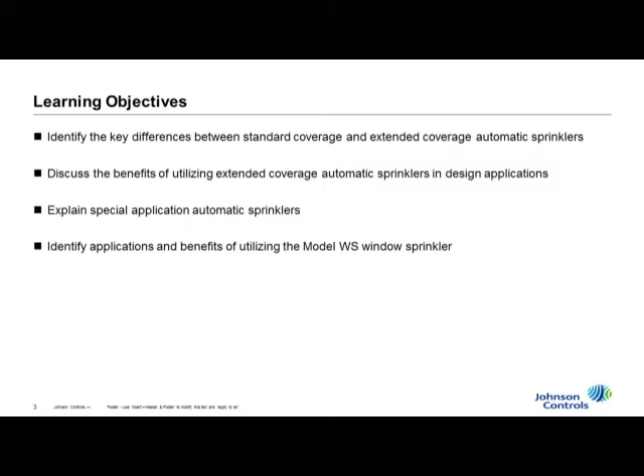So what we're going to do here is identify the key concepts on sprinklers. We're going to talk further into extended coverage sprinklers because there's a lot of misunderstandings, and then also how to utilize special application sprinklers. Similar to what we spoke about earlier about the performance-based design and things that are outside the standard practices.

So one of the big things in the fire protection industry is the understanding of sprinklers, and Hollywood doesn't do a good job for us. If you see the movies, somebody shoots a sprinkler and then all of them activate. It's not how it works. They're all individually operating sprinklers. So if a fire was to start here and I had a sprinkler above me, this one would operate, but the ones further would not. Now we do have different deluge style systems with open nozzles for special hazards and special protections, but your traditional sprinkler system doesn't work that way. Even to this day, there's a lot of commercials out there that don't do any justice for us.

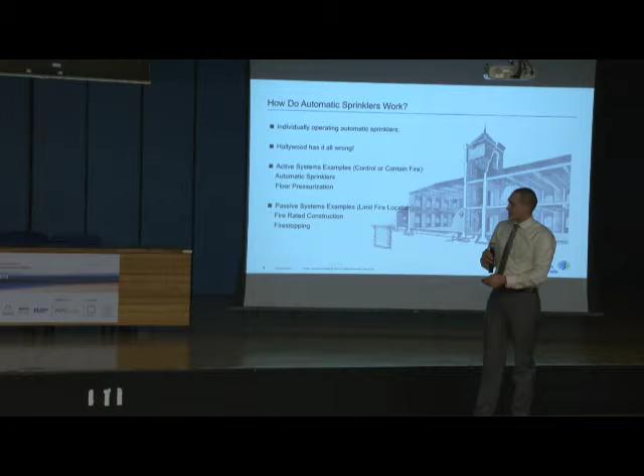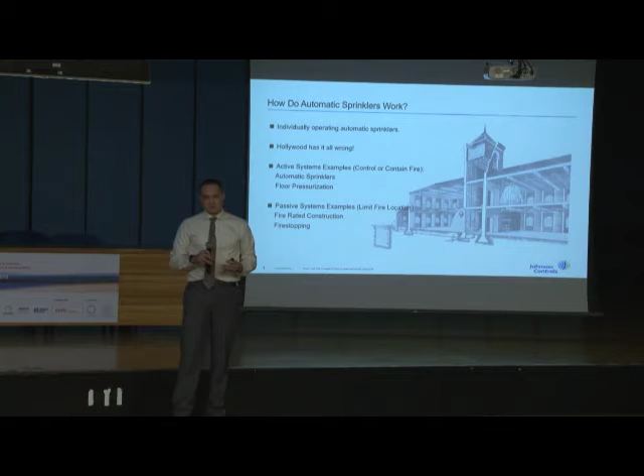So another thing to mention here is active systems versus passive systems. Our passive fire protection systems are typically construction, your fire-rated corridors, and what they're made to do is isolate that fire in a specific area and make it so it doesn't grow further. When we talk about our active fire protection systems, we're talking about our sprinklers. When they operate due to heat, we use that water to actually control or suppress the fire, to make that fire smaller or more manageable for the fire department to come and put the fire out. So we're going to concentrate heavily on active fire protection systems here.

So just a quick introduction to sprinklers. We have three standard installation types. You have an upright sprinkler, which is on the left, very obvious here. You have an umbrella-shaped deflector. Water flows up, hits the deflector, down it goes towards our hazard. The pendent on the bottom side of the pipe, and then we have a sidewall, which we'll talk about further as well. The sidewall is typically what you see in your hotels and office buildings. What that allows for is easy installation. If you have a common chase and a repeating floor plan, I can just run one pipe up that common chase and into that hazard area with the sprinklers, rather than run sprinklers up and over the hazard.

So what I have here is a fusible link sprinkler. How this one activates is there are two pieces of metal soldered together. At a certain temperature, that solder will melt and those two pieces of metal will separate. You also notice that there's glass bulb style sprinklers, and how they work is inside, the liquid expands at a certain temperature. There's also an air bubble inside there. So when it heats up and it expands, that glass breaks due to the pressure.

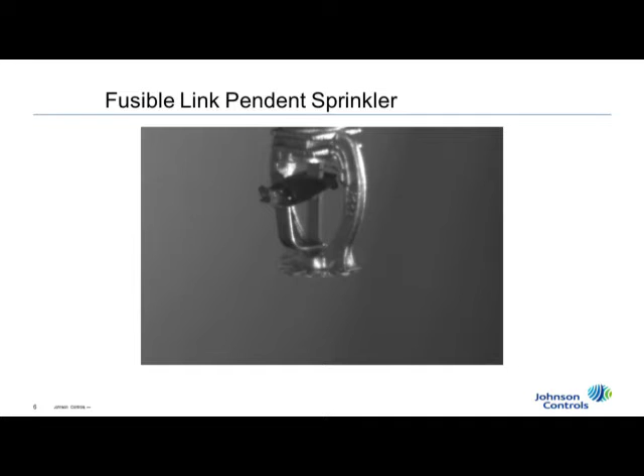Very similar individually operating sprinklers, but here's a fusible link sprinkler operation, shown in a slow motion video. Videos are a lot better than listening to me the whole time, so there's going to be a few videos in here.

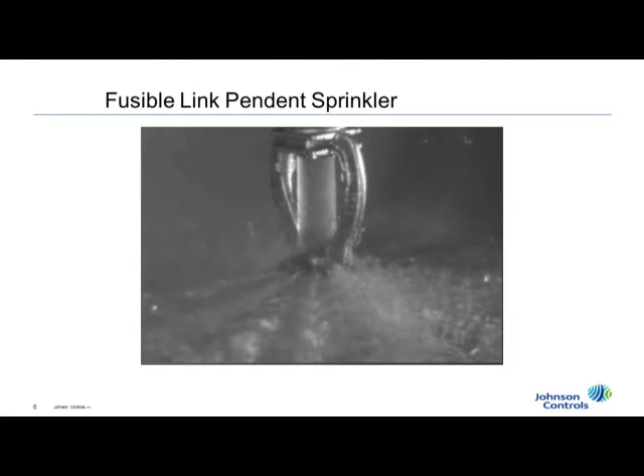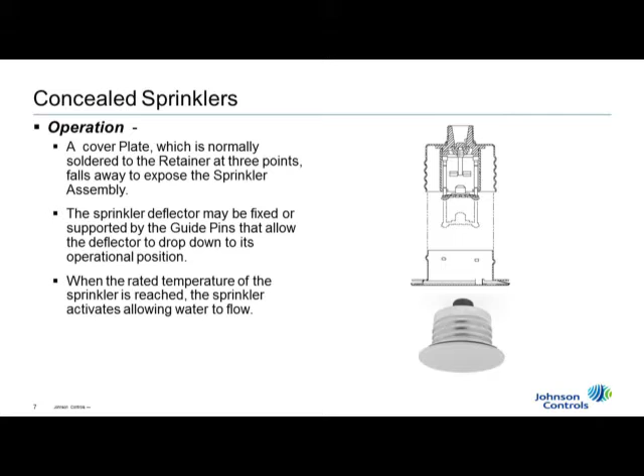So another misunderstood sprinkler in the industry is the concealed sprinkler, and you'll see this concealed sprinkler all over the place. The benefit of this sprinkler is for aesthetics. A lot of architects, a lot of people don't like the looks of sprinklers. I disagree, but not many people have my beliefs. So what we do is we offer the concealed sprinkler. I'll have a video to show operation, but you'll notice that there's a small gap here, and that cover plate is soldered on at a lower temperature than that of our sprinkler operation. So as the fire grows, this white plate here will fall off, exposing the sprinkler. As the fire continues to grow, the heat will release the operation mechanism, and it will operate the sprinkler.

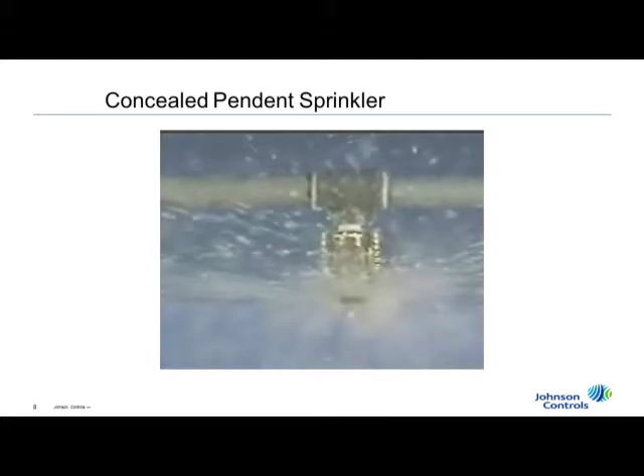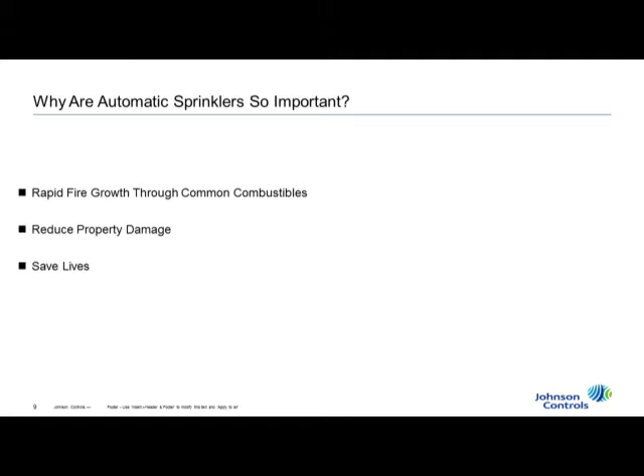So why are sprinklers important? If you start to study sprinklers and look at the benefit of sprinklers, our concentration when designing sprinklers is property protection. And I know it's kind of counterintuitive, but if we're able to keep the structure up, we lose less property, but ultimately people can get out of that structure. So it also saves lives. So property damage, property cost during a fire event, and life safety.

One thing in Rhode Island that kind of hits home to us is the Station nightclub fire, very similar to your MGM fire. If you've been in the industry at all, you've kind of heard of this. In Rhode Island, there was a nightclub, and during a rock concert, they used pyrotechnics, fireworks, and whatnot. Throughout that facility, there was combustible soundproofing, and what you're going to notice is there was a flame spread through the area. There were some egress issues as well, but the fire got out of control very quickly.

After the fire, TYCO and NIST, the National Institute of Standards and Technology, did a series of studies. They initially started fire modeling to see this fire growth. And then what they did was install sprinklers, so you could see the difference between a non-sprinklered facility, of which it was, and a sprinklered facility if it was to be sprinklered.

I say this kind of touches home because I'm from Rhode Island. If you live there, you kind of know somebody who was affected by this fire. But we ultimately lost 100 lives that day, and we also injured over 200 people. So what you're going to see here is a video and a mock-up of this fire inside of a nightclub-like area. In the back portion, the black mat there would be combustible soundproofing.

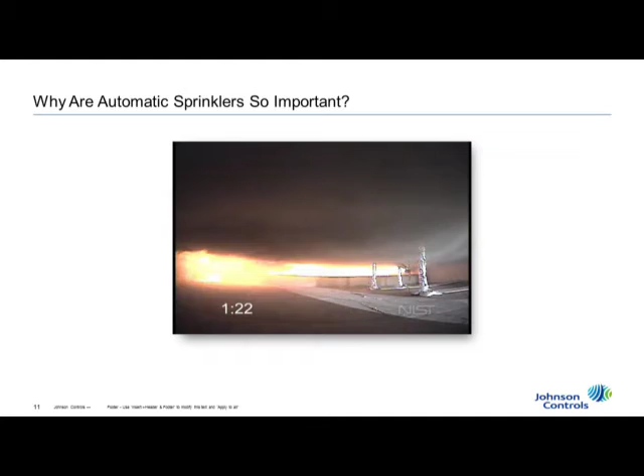So one thing you take a look at very quickly is that smoke level. It started at the ceiling, very rapidly grew towards the floor itself. This changed our life safety code in Rhode Island drastically. What you'll notice now in our new areas is you'll see exit lights down at the base of the floor, because that's typically where you're trying to crawl out.

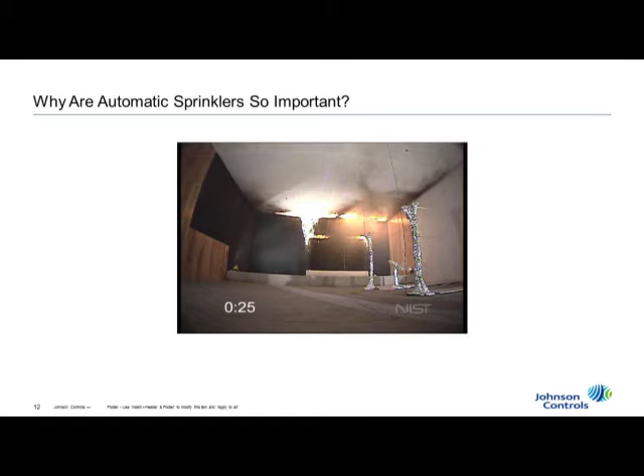But to take it a step further, we installed sprinklers to see what sprinklers would do to the very same scenario. You can see our pendent sprinklers installed here, and our activation of our sprinklers. Notice again that not all of them operated. We still have a couple here that did not operate.

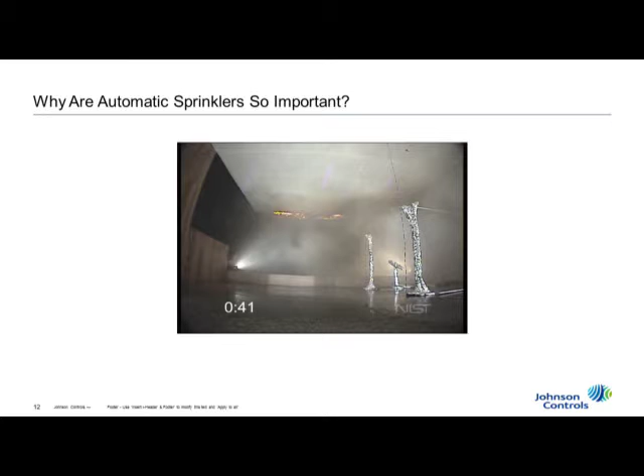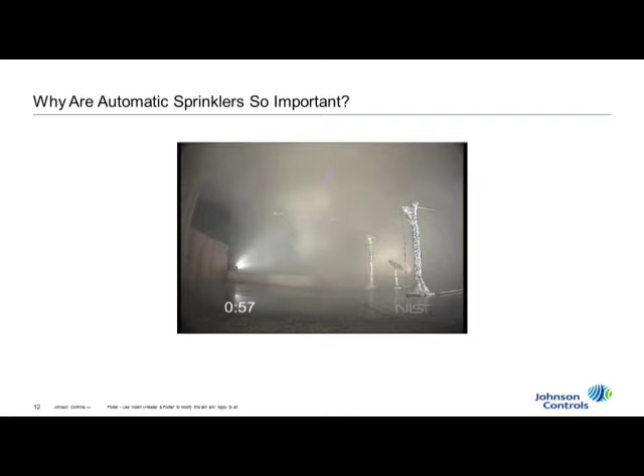So it's pretty obvious on this video, and we're not as far into this video, that survivability and property damage by far would be reduced with the installation of sprinklers. So it's a pretty eye-opening, even though it's a sensitive subject, pretty eye-opening comparison from sprinkler to non-sprinkler.

So how do sprinklers work? That's a kind of interesting topic, because if you've been in the industry for a while, you've noticed that the triangle kind of moved away, and it's a tetrahedron. There's a chemical chain reaction. But sprinklers concentrate on the basis of the fire triangle, being heat, fuel, and oxygen. If you remove any one of those legs, you cannot sustain fire.

So what sprinklers do is they cool. With water, it takes a lot of heat, a lot of energy out of the fire and reduces that heat, inherently knocking the heat leg out of the fire. So that's how we achieve control with sprinklers.

From here, we're going to move into standard coverage versus extended coverage. So after our introduction to sprinklers, now we're moving on to standard spray and extended coverage sprinklers. One of the misconceptions is how an extended coverage sprinkler works, and this is a really good visual comparison of the different types.

With our most common type, the standard spray sprinkler, you'll notice that as I increase the pressure, I increase the density or the amount of water downwards. The coverage area, say a 10 by 10 area, doesn't change drastically, just more water goes downwards. As that darkens up, more water goes down as you increase your pressure.

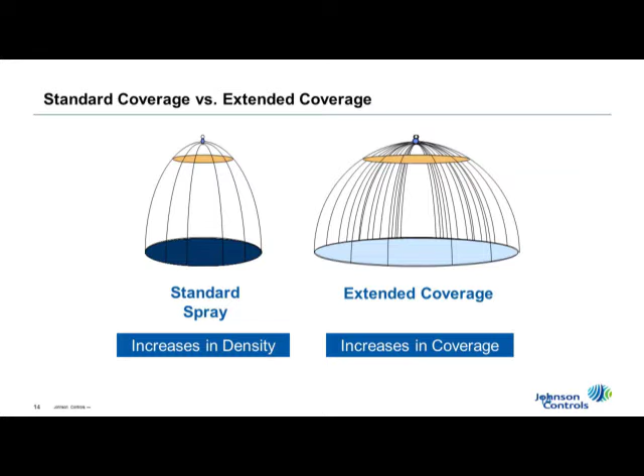So what this allows us to do is have design flexibility. Where only one standard coverage sprinkler could cover, or maybe two standard coverage sprinklers, I can eliminate one of those and put in an extended coverage sprinkler and get an equivalent or better fire protection scheme.

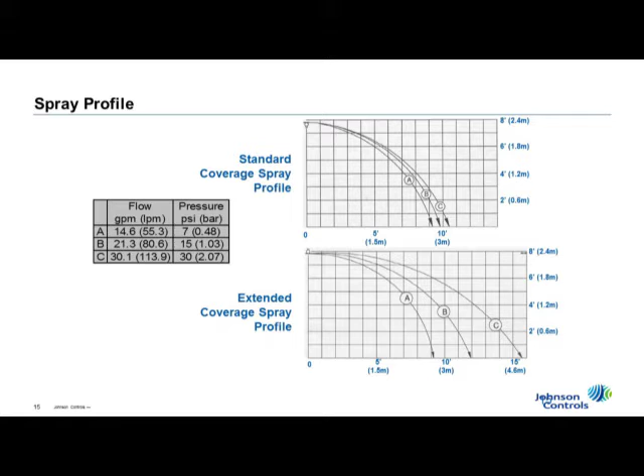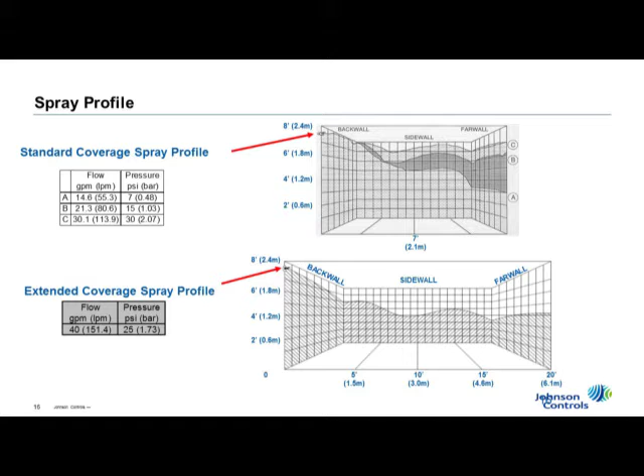So it's a pretty useful tool. You'll notice with our extended coverage spray profiles, it's a flatter spray pattern. One thing it does is widen out, which means obstructions could be more difficult to get water around, things like hanging fixtures or conduit running through the facility. As you use an extended coverage sprinkler, this is how it achieves that - it just kind of lifts the spray pattern up a little bit so it can reach that extended coverage.

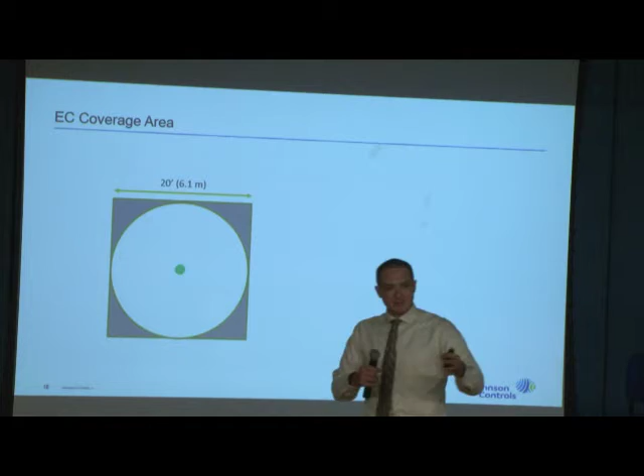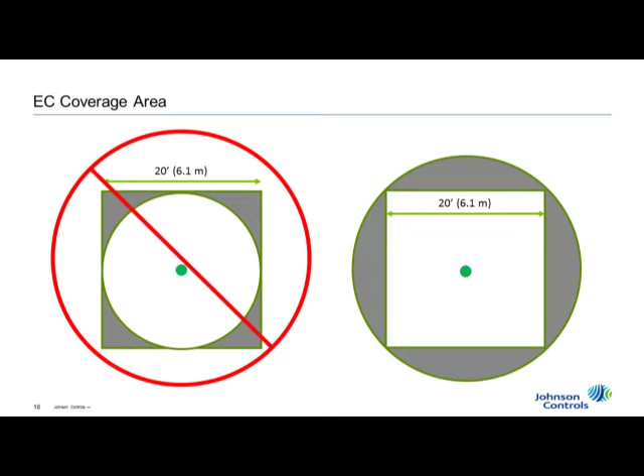So this is a common myth. Let's say our extended coverage sprinkler needs to protect a 6.1 meter area. This circle represents what people typically think an extended coverage sprinkler would cover, when in fact what it does is ensure that density is maintained over the entire area - so it's actually an expanded throw or expanded spray pattern than what's commonly believed.

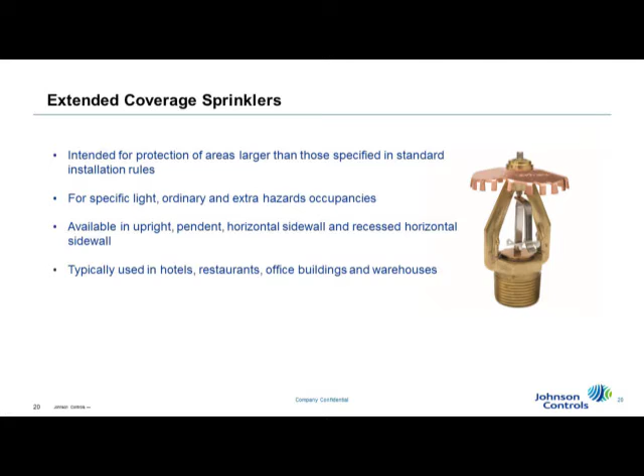So what can I use an extended coverage sprinkler for? Think of the hazards you have - you can utilize it for the most part. Your light hazard occupancies, things like office buildings, all the way to ordinary hazard places like parking garages, through your extra hazard processing plants, and all the way into storage. People tend to forget to utilize them for storage as well. So it's a very versatile sprinkler, just very misunderstood - that's why it's not applied commonly.

NFPA 13, the installation standard for water-based fire protection sprinklers, lines out how you would utilize their design areas. A lot of manufacturers like us also try to capture niche markets and do our own testing, so you follow our manufacturer's guidelines - they'll walk you right through that as well. Technical data sheets can be your best friend when designing for these.

But one of the big things we tend not to think about during sprinkler design is our customer's pocket, right? Our sprinklers are fairly expensive, our sprinkler systems are very, very expensive. But if we can decrease the cost of installation - one thing we don't worry about in the US but you may worry about in Brazil, things like painting the sprinkler pipe, that takes a lot of money and a lot of time - if I can decrease that by utilizing an extended coverage sprinkler and decrease the amount of branch lines and cross mains, ultimately our customer gets a better protection scheme, and it's also better for their pocket.

So what you're seeing here is a sprinkler design. Both you're going to see standard sprinklers and extended coverage sprinklers. A very good benefit here for repeating floor plans is utilizing that sidewall sprinkler. So here, this is a hotel area. The rooms themselves are 5 meters by 10 meters, 4 rooms, 9 meters by 10 meters. Very common layout, repeating floor plan all the way up.

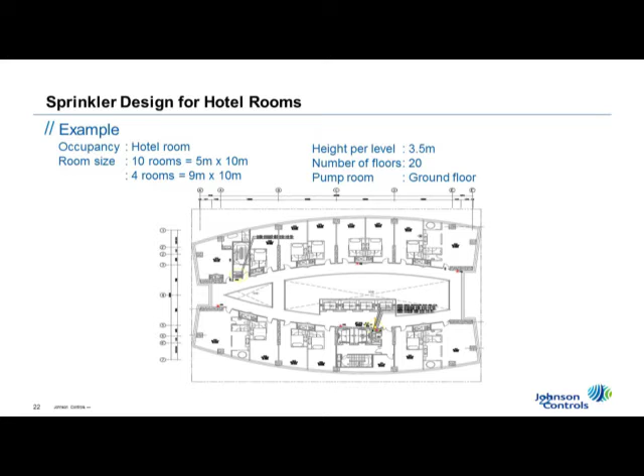So what the standard density area method tells you is if you have a hazard, you need this density downwards. What we would classify this occupancy as is an ordinary hazard occupancy. Here's how you utilize these charts, per NFPA 13: you have your density here, at this point, at this area. So the most remote area, the hardest place for us to get water, requires this density. Ordinary density, 6.1 millimeters per minute, over 139 square meter remote area.

So with our standard coverage sprinklers, utilizing a K5.6 sprinkler, a fairly small orifice style sprinkler, we also compare utilizing an extended coverage 11.2 K factor or larger orifice sprinkler. With the larger orifice sprinkler, you will get more water out, but if I design for fewer heads, it should equate.

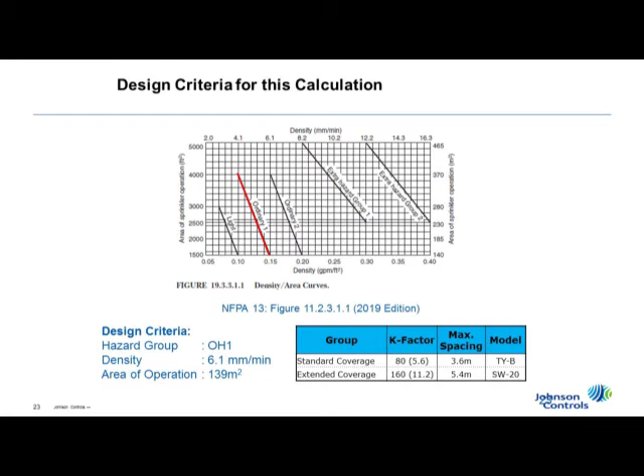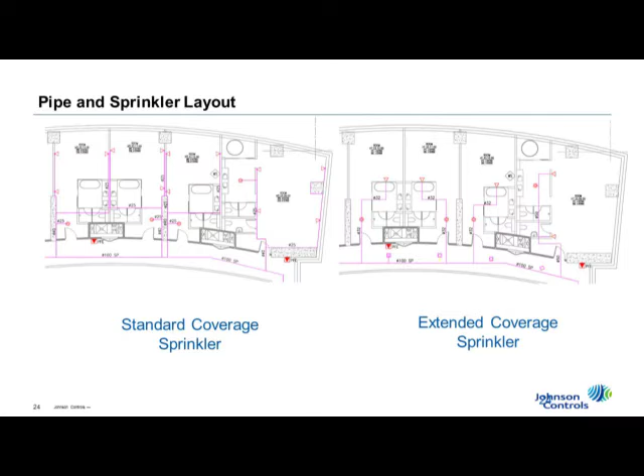So it's pretty self-explanatory here. Same exact layout, one utilizing NFPA 13 for standard spray sprinkler design, and one with extended coverage sprinklers. I can eliminate up to 3 sprinklers and 2 branch lines, a decent amount of pipe, just by utilizing the extended coverage design scheme.

Now as you move into extended coverage sprinklers, you have 1122 liters per minute at 9.8 bar. So relatively similar flows and pressures, but a lot less pipe, a lot less sprinklers. Again, ultimately better for your customer as well.

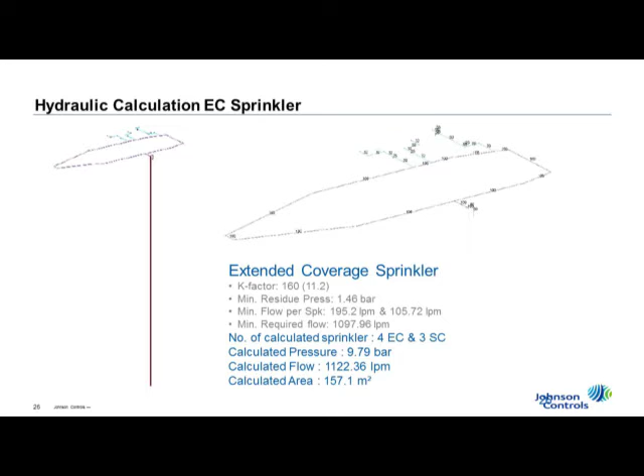So this portrays into the design, pipe size, cost, labor, and that's what we're comparing here. Sprinkler spacing of our extended coverage sprinkler, 5.4 meters. Standard spray sprinkler, 3.6 meters. And if you notice here, we have a lot less pipe for our extended coverage sprinkler. A lot less pipe, a lot less fittings, a lot less heads.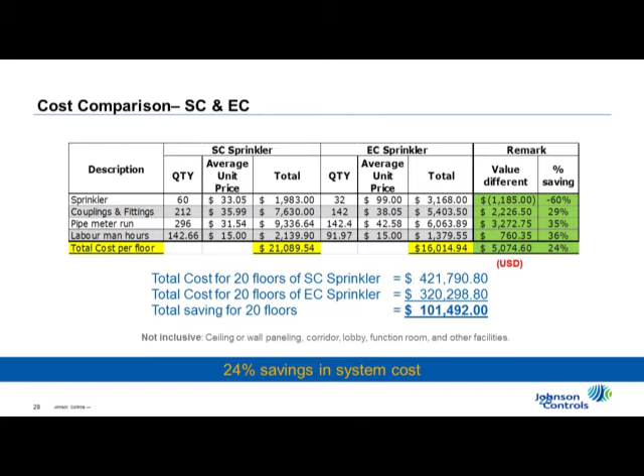So this is not a sales pitch, but I'm going to pull up a couple of these technical data sheets just to show you things to look out for.

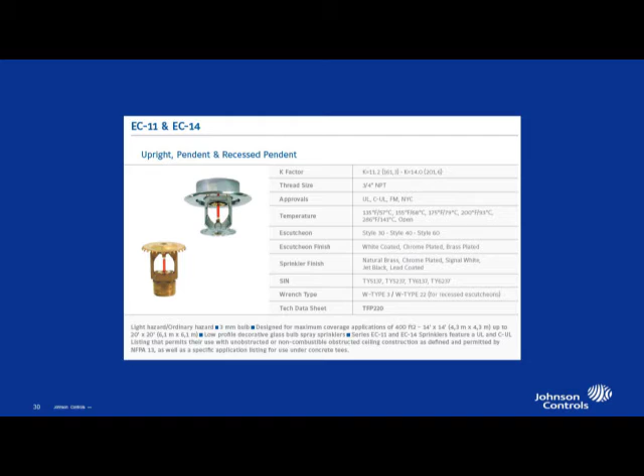They can also become recessed. That's another aesthetically pleasing sprinkler. It just allows it to fit further into the ceiling tile. But again, you're noticing a 6.1 meter by 6.1 meter coverage area. That's a very large area when we start talking about sprinklers. Pretty impressive.

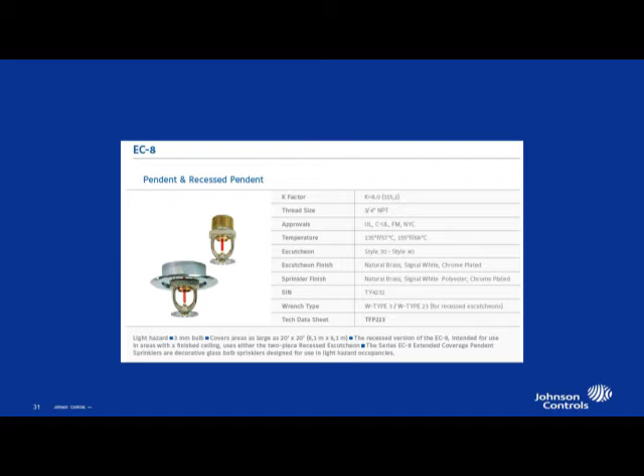All different flavors. The colors are not flavors, like a lot of candies and things like that, but all different shapes and sizes.

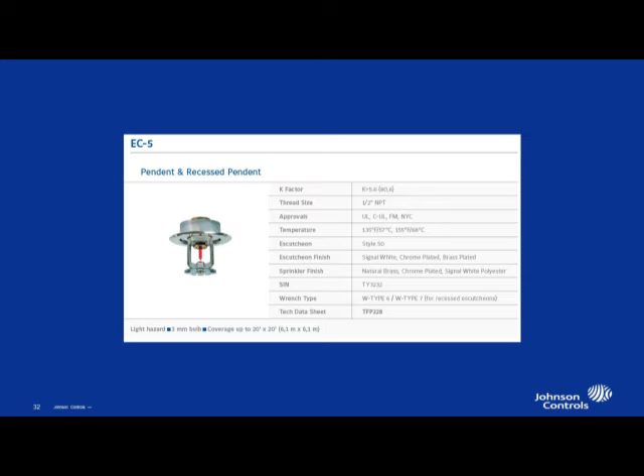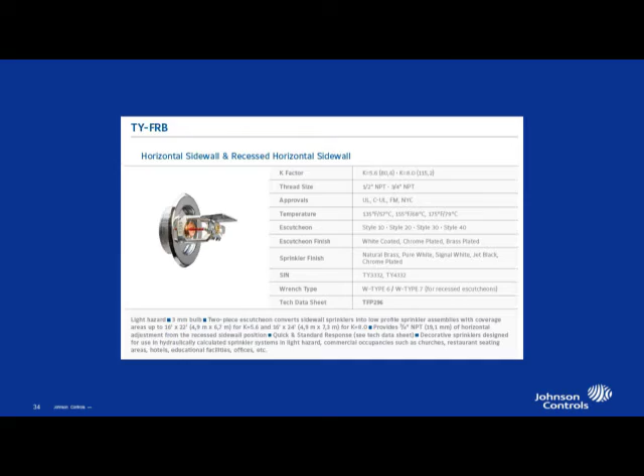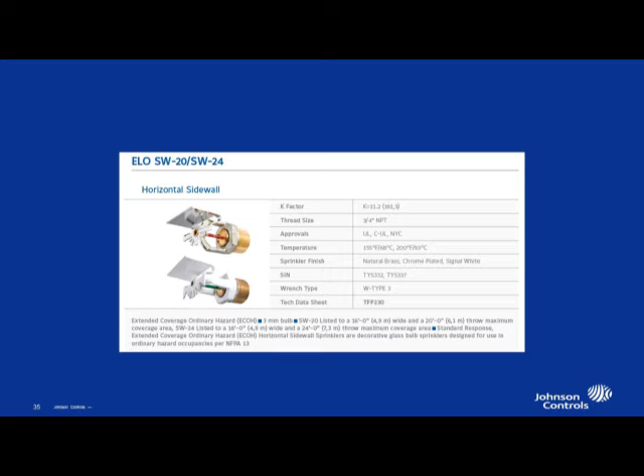I'm sorry, I keep looking back. I'm trying to convert from feet to meters. It's not the easiest for me. I apologize for that, but that's why I'm looking backwards here.

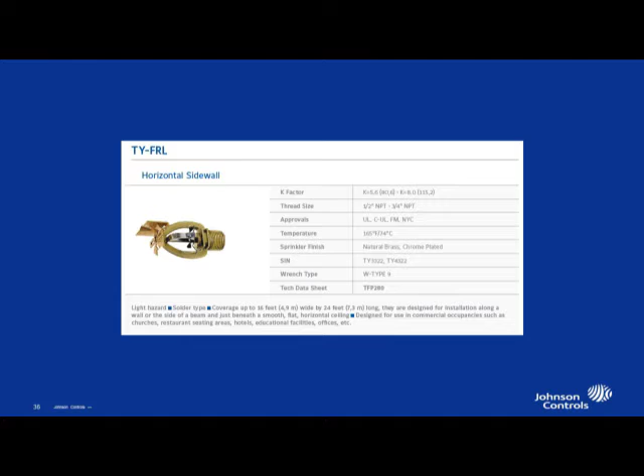So again, 4.9 meters by 7.3 meters. And then we also have options in concealed pendants. One thing that we don't think about is the psychological means of sprinklers, especially in hotel rooms. A lot of big issues we have is somebody hanging, I don't know, a nice white dress or something like that on one of the sprinklers, on one of the sidewalls in these hotel rooms. They don't understand that typically sprinkler water is disgusting to begin with, very gross, very dirty. But if you can eliminate that visual of the sprinkler and utilize a concealed sprinkler instead, it's a lot better of an option.

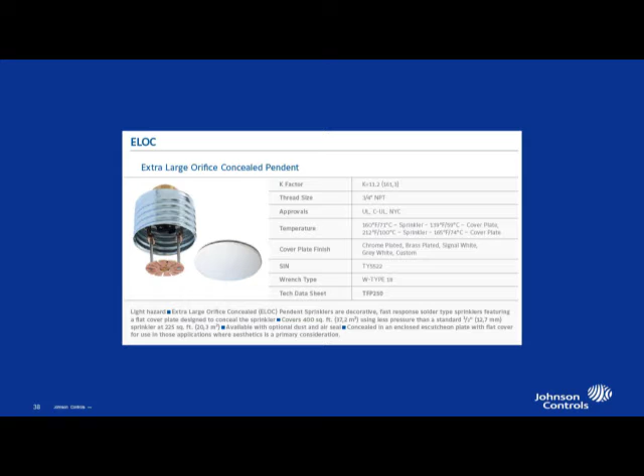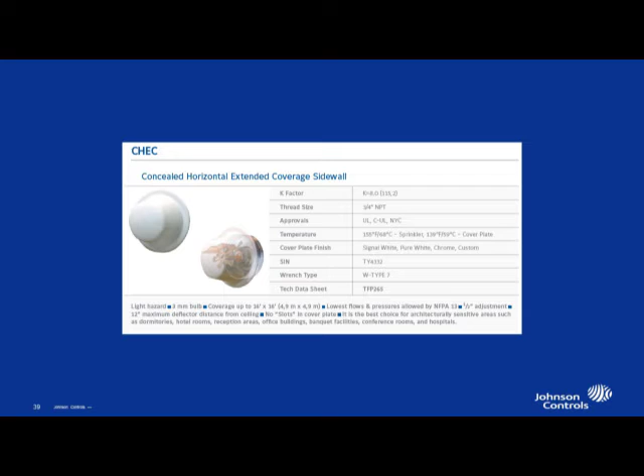So 37.2 square meter coverage area. Pretty impressive. These concealed sprinklers come in all different shapes and sizes as well. You'll also notice it tells you exactly what you could utilize it for in the bottom line here. For dormitories, hotels, reception areas, office buildings, banquet facilities, you name it, whether light or ordinary hazard, you could utilize it.

So another thing you can utilize them for is MRI rooms. We have a non-metallic sprinkler for those areas for very expensive medical equipment.

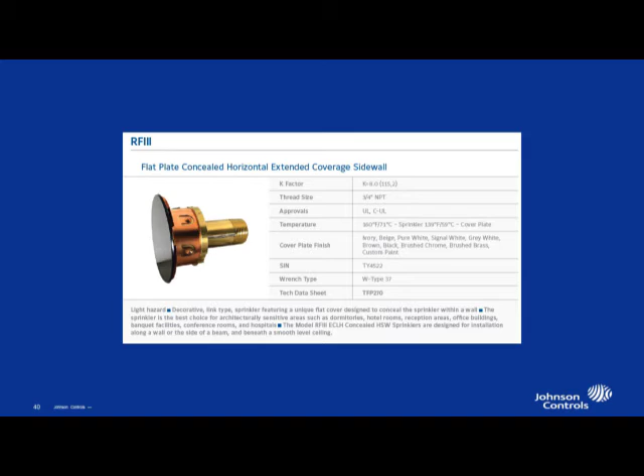Then we'll start talking a little bit about our dry pendants. And what this allows for is colder environments, which I know is kind of a joke here in Brazil, it's been kind of warm the entire time. But if you think about cold storage areas and loading docks where you might get that cool airflow, this allows you to utilize a dry barrel sprinkler, one with no water in it, that threads into our wet pipe system to allow for a protection scheme.

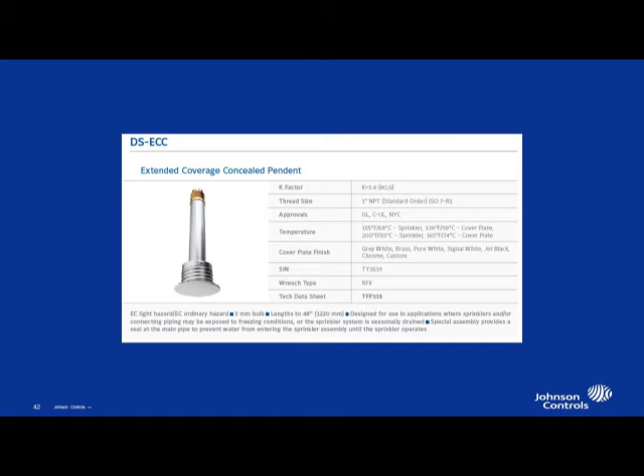So we also have extended coverage dry barrel sprinklers as well, and dry barrel concealed. Plenty of options. When you start to look at the standard, I kind of challenge you to take a look at the standard practice, utilizing standard spray sprinklers, and compare it to the extended coverage, because a lot of times those chapters never get opened because we find one solution and kind of stick with it since that's what we're used to. Those dry barrel sidewalls, a lot of times, are good for cold areas like carports and things like that as well.

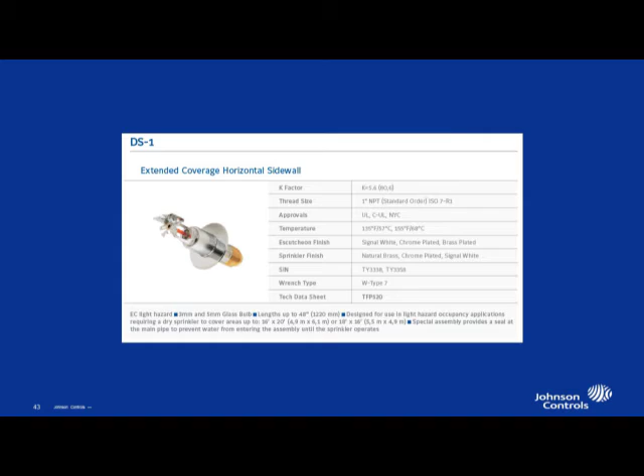So we're going to switch gears into window sprinklers. Hope that gave you a pretty good overview of extended coverage sprinklers, or at least a little bit of information, so that you can research more and see what application fits your needs. But we're going to move into something a little bit different, and that's the window sprinkler.

What this allows for is a 2-hour equivalent rating. When I say rating, I'm talking about a fire-resistant rating. So here in Brazil, my understanding is your external facade has to be fire-rated. This would not be a good option for that.

But for interior exit corridors or egress corridors that need to be fire-rated, utilizing an active means, being a sprinkler, you can get an equivalent 2-hour rating.

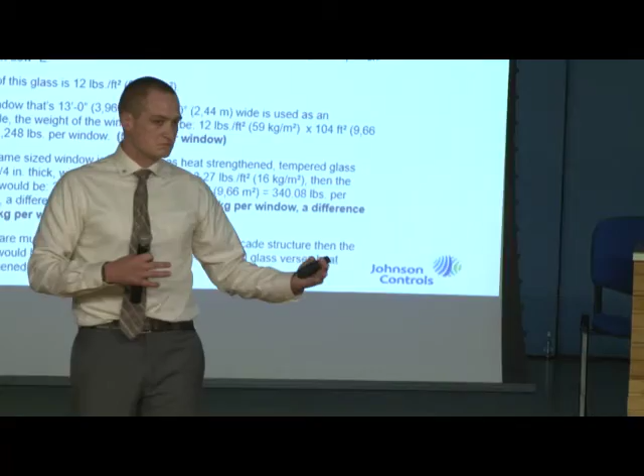Another thing we don't typically think about is our customers' pockets. When we talk about fire-rated glazing, it's typically $90 per square foot. Sorry again for the conversions. But it's very expensive per square meter, and it's a lot heavier, which translates into structural means as well - you have to use the structure to support the glazing units. So if we could utilize a sprinkler to achieve a fire-resistant rating, that was the concept behind this, it would be a lot more cost-effective.

But this is a special application approach, or a performance-based design approach. If you open up NFPA 13 or any of your building codes, you're not necessarily going to see the requirements and standard installation practices for this window sprinkler. Us as a manufacturer can utilize what we call the new technology clause inside these code books to achieve an equivalent or better protection scheme, utilizing tests and research to back our design plans.

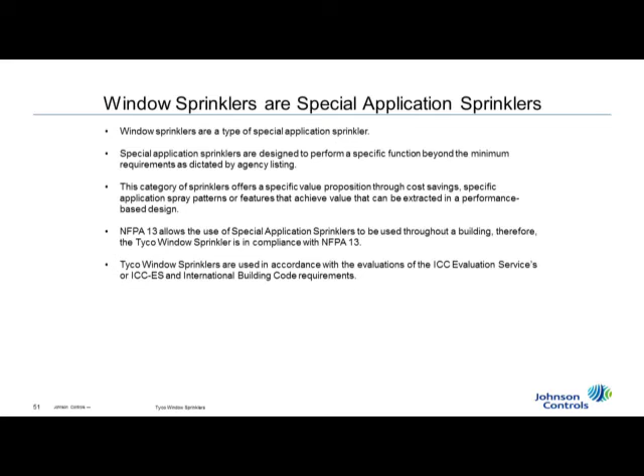So this would be an alternative means if you use it in the proper orientation for your fire partitions, fire barriers - those are typically your passive systems. You have multiple temperature ratings here, but the equivalency is for a 2-hour rating. So if you need a 4-hour rating in that corridor, this is not a solution for all fire ratings.

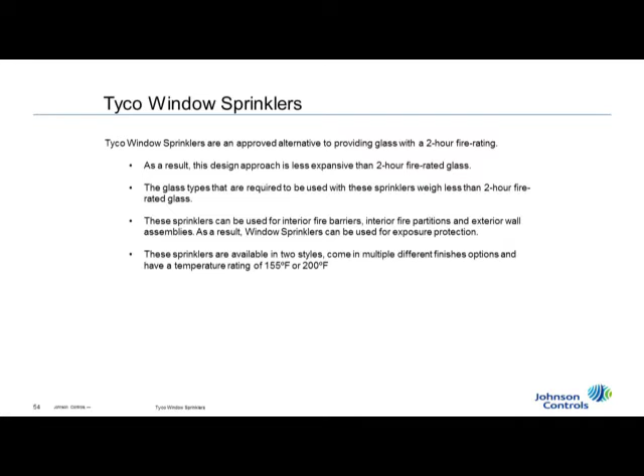One common misunderstanding that most jurisdictions have is the utilization of sprinklers for glazing units themselves. I've been to plenty of cities where you go either into an atrium or into hotel rooms, and somebody has approved a standard sprinkler right next to the window as what they call a water curtain, which is a very misunderstood term in the fire sprinkler industry.

Our primary goal here is to utilize this sprinkler and put a clean sheet of water over the entire glazing. What that does is decrease the penetration of radiant heat. As that radiant heat spreads - very hot fire, cool glazing - it starts to hit the glazing, then fire service comes in and puts very cold water on that glazing. If we don't have a clean sheet of water, we get what they call thermal shock, and that glazing unit breaks, which inherently defeats the whole purpose of a fire-rated glazing unit.

So that's the whole concept behind this window sprinkler. This is a pretty good visual to show the difference between your standard spray pattern and your window sprinkler spray pattern. This misunderstood water curtain from your standard spray sprinkler has an umbrella-shaped spray pattern, which leaves gaps, allowing for that thermal shock we spoke about.

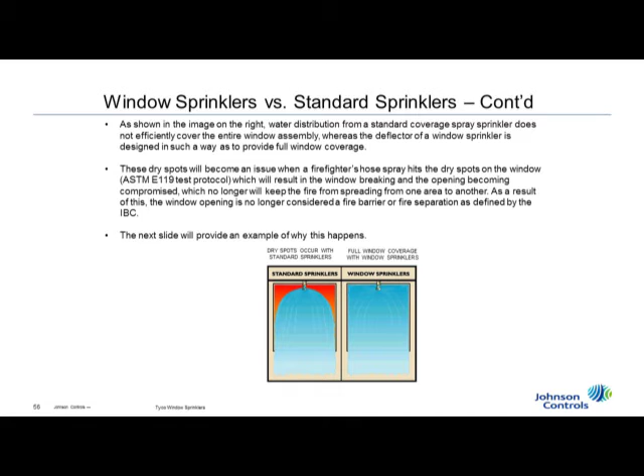I have some videos I'm going to show you. What we did with this sprinkler is use the common time-temperature curve that you would use for your standard fire-rated glazing units. Inside that oven, we utilize these sprinklers. Then over a period of time, we make sure there's no thermal failure on the glazing unit - this is a fairly standard glazing unit. At the end of the test, they take a hose stream and spray it to see if that thermal shock happens. I have two videos there of how our sprinklers will work, further on.

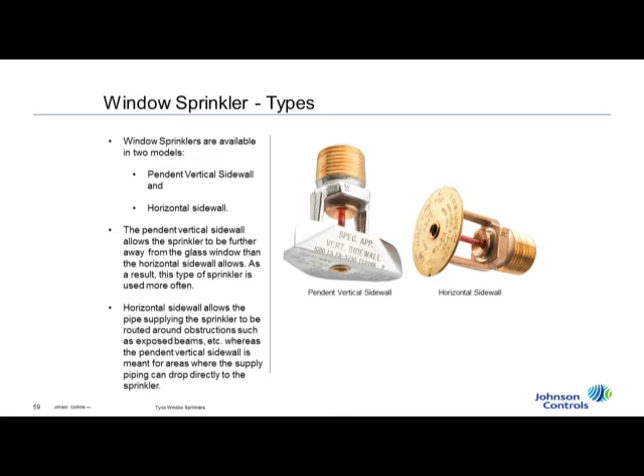But just like the other sprinklers we talked about, there's plenty of different flavors of these, plenty of different shapes and sizes. You see here vertical sidewall and horizontal sidewall, and this is all based on your construction type and what will fit that mark.

So here's a couple examples - these are actual installations. The one picture to the left is MIT in Boston, Massachusetts Institute of Technology. What you're seeing here is a separation of a corridor to a clean room, someplace most likely being used at MIT for medical equipment - they want to keep the dust and whatnot out. We're utilizing the window sprinkler here.

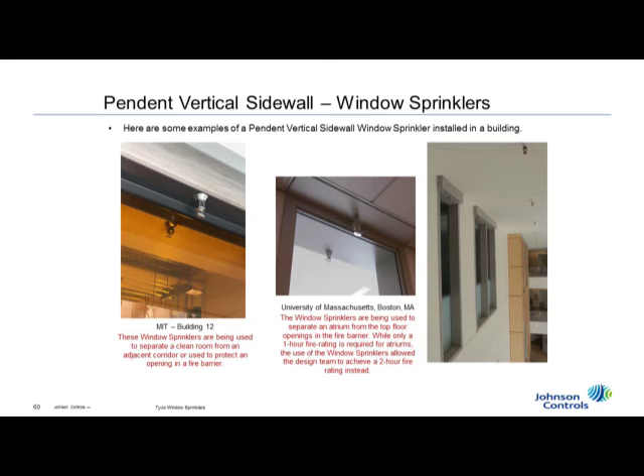So here's our video. What this is, we have a fire about 2 inches away from our glazing unit itself. I'd like to have this person's job, it looks like fun.

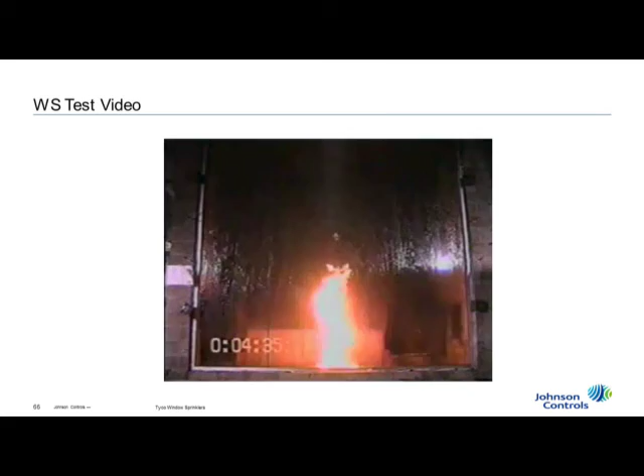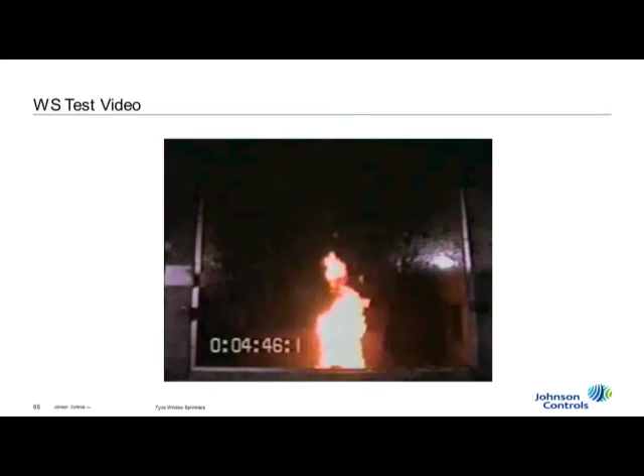Okay, our sprinklers are activated. You can see that the water is flowing down the glazing unit now. It looks like we have a clean sheet of water here. After time, the fire is extinguished. I know I told you that our sprinklers control, but it just shows you how effective sprinklers really are.

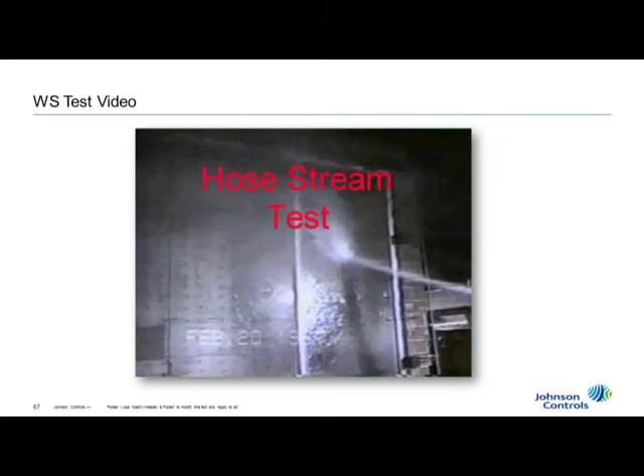Pretty impressive video to see. The next video is going to be the hose stream test. After that time temperature curve, we introduce the hose stream to the window to see if there's going to be any failure due to thermal shock.

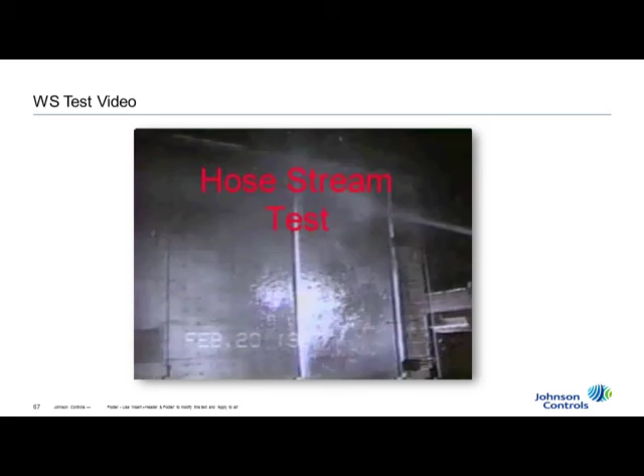Fairly realistic test - during a fire scenario, that fire could be burning for a decent period of time. Then fire service comes in and operates their hoses. The last thing you want to do is penetrate that wall because you could have radiant heat spread through the structure itself.

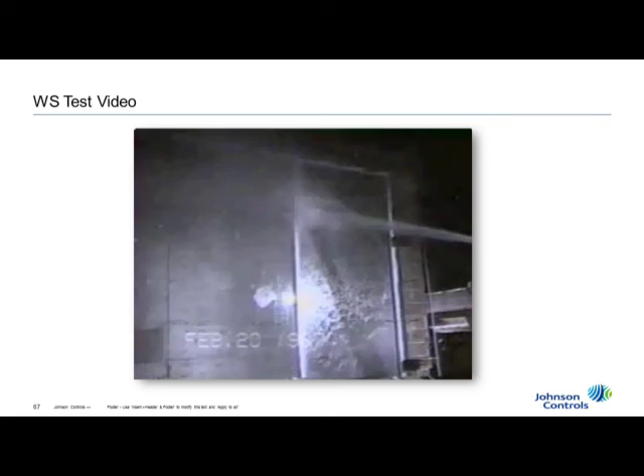I will say I've done some fire service training. Whoever trained this person here must be a little bit crazy because that hose is going all over the place. But it is a test to ensure that throughout the entire glazing unit we don't get failure.

One thing on the last video I showed you, just to point out, and I had alluded to it, is the control of fire versus suppression of fire. Our sprinklers are designed to control fire, and in this scenario, they're designed to protect the exposures of that fire. But if it's used and designed properly, inherently you'll get a better fire effect, or that fire will be smaller when it comes time to extinguish the fire.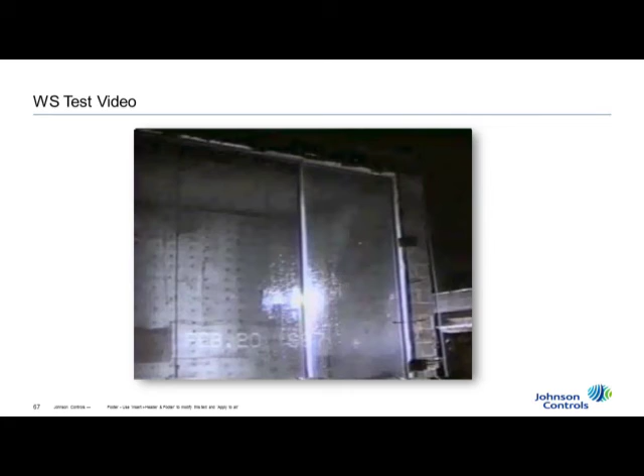What you utilize in the design here, since it is performance-based design, you have to go back to the manufacturer's guidelines because we did the testing, we have the test report. You'll notice there's an engineering evaluation report as well that just explains that time temperature curve as you're starting to utilize it again through egress corridors when you have glazing units in buildings. There's an email there that if you are interested in having these test results, feel free to email.

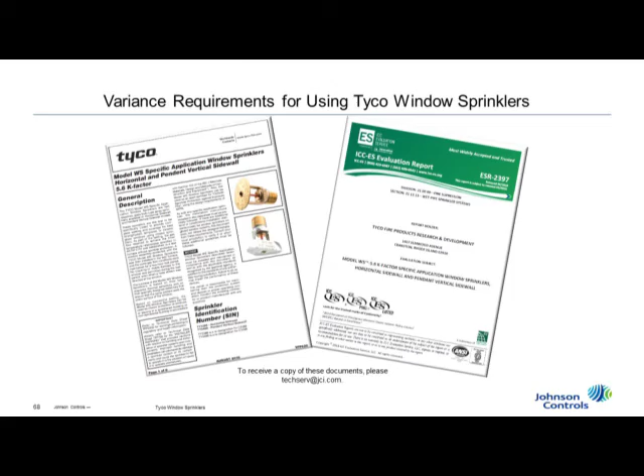Since it's performance-based design and outside the scope of our standard practices, there are some unique installation requirements. Things like spacing, the types of glazing that you could utilize it on are all limited based on our testing.

One thing you'll notice here, this is just the installation of the horizontal sidewall. You have to maintain a space of 12.7 millimeters to 101.6 millimeters - that space must be maintained. You also notice that it's on a flat ceiling, typically an unobstructed ceiling as well. If you were to hide this thing inside of there, what you'll notice is the heat response won't be good. So it has to be a flat ceiling - that way the fire grows and it's able to ensure that our thermal element operates.

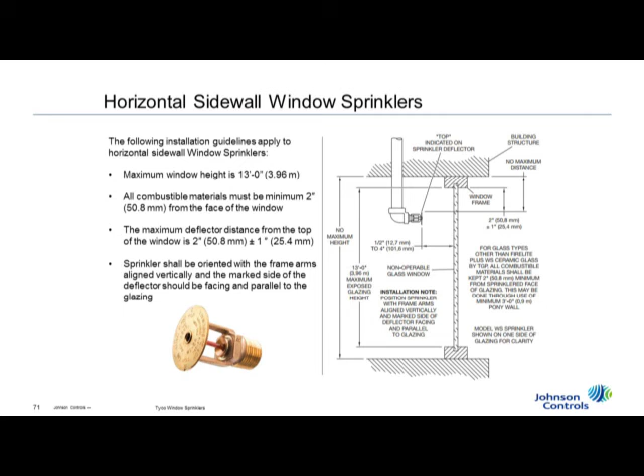Same with our vertical sidewall here. One big thing with this testing is you have to maintain combustibles 2 inches, or 50.8 millimeters, off the face of the window. We do not want our heat right at that window. So you'll notice that it requires some other installation of the structure itself called a pony wall. The reason for that is because we didn't test it with the fire on top of the glazing, so we can't back it with our test reports.

This is a little sneak peek - we noticed that people don't typically like the looks of sprinklers, so we also have a concealed option that should be out on the market fairly soon. What this does is eliminate the visual looks, and it also eliminates the need to hide it with pockets in the ceiling and whatnot. Very similar requirements, very neat product. A lot of people are waiting for this product to get out on the market. It's mind-blowing to me how many people don't like the looks of sprinklers.

You'll also notice here that the minimum spacing of 1.83 meters up to 2.45 meters is very important - you're not going to see that in your standard NFPA 13. If you want to space it closer, we require that you put baffles in. That way it blocks the spray pattern, because if one sprinkler operates and it wets another sprinkler before it operates, the other sprinkler will never operate. We call that cold soldering. So these baffles are very important as well as you go through the design criteria.

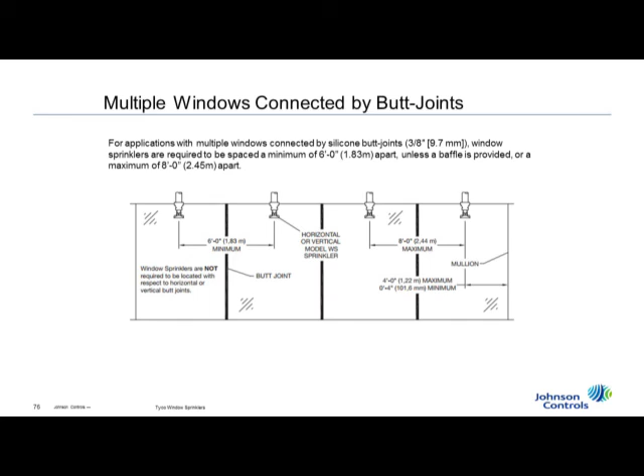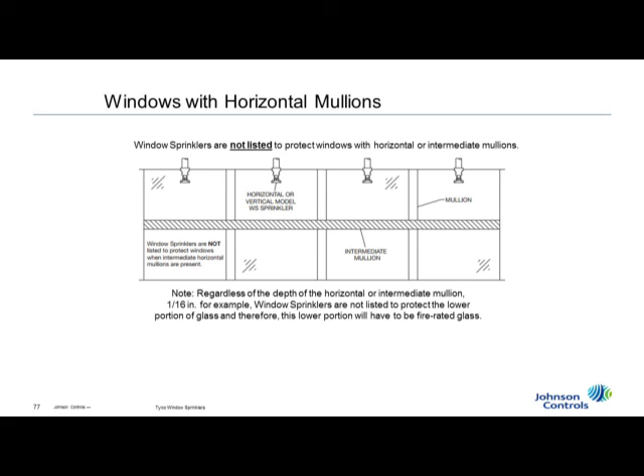So one thing they're not listed for, and it kind of makes sense, is horizontal mullions. If you have a sheet of glass and some sort of structural or aesthetic mullion in the horizontal direction, that doesn't allow for that clean sheet of water to flow down the entire sheet, so you can't utilize it for that either.

So to get a true equivalent 2-hour rating, it's required to have a sprinkler on both sides, which makes sense, because if I start a fire on one side, the sprinkler behind that glazing unit is absolutely useless. We've seen allowances that allow for you, and this is per the authority having jurisdiction, which I know is kind of a touchy subject here, but whoever's designing this, sometimes there's an allowance to only utilize a sprinkler on one side.

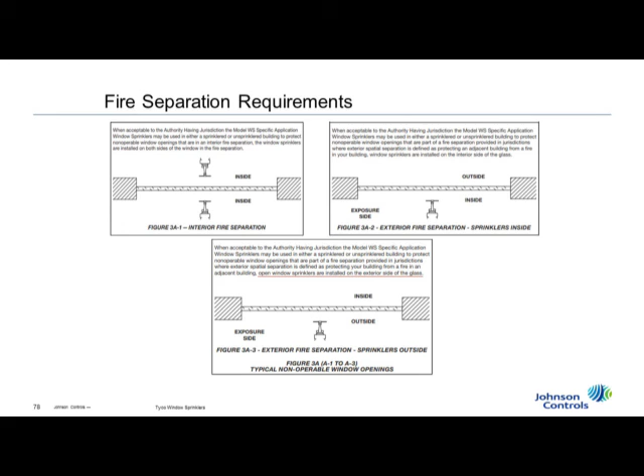So if you think of a glass atrium, 10-story building, if we had a fire on the 5th floor, we've got bigger issues than putting a sprinkler on that glazing unit. So if you protect the room, per se, on the outer side of that atrium and use one sprinkler, sometimes there are allowances. But per the standard, you need a window sprinkler on both sides of the glazing units.

So single pane glazing, it's a very specific type, insulated, non-operable glazing, very important. If you have doors and windows that you can open and close, the sprinkler hasn't been tested for that, so it would be required to use fire-rated glazing there and protect the surrounding glazing with our window sprinkler.

Sloped glazing is not allowed. If you ever take water and put it on a sloped piece of glass or something like that, especially on the inside, it's not going to create that nice clean sheet of water.

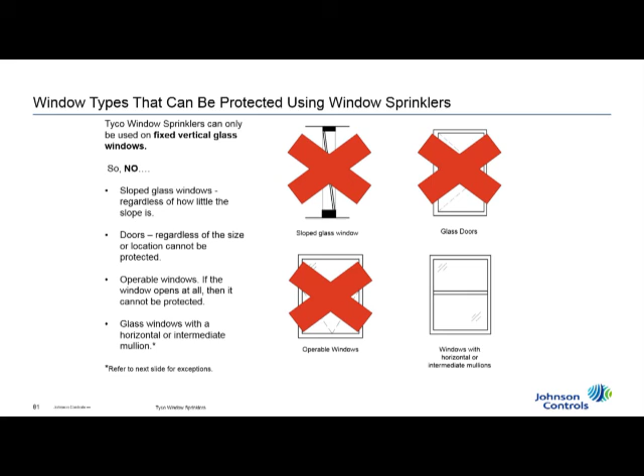Glass doors are operable. You have to use fire-rated doors and protect the space surrounding it with the window sprinkler, operable windows, and last but not least, which we've already talked about, is the horizontal mullions. You're unable to use it.

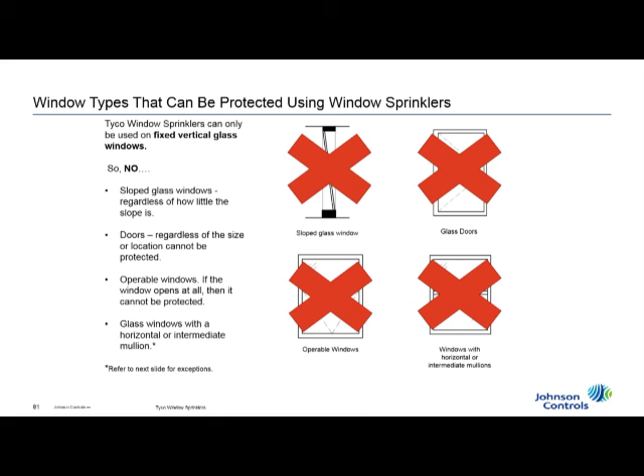So it's kind of interesting when you release a product like this, because everybody wants one solution that fits everything. So it's really important that you contact us or look at the manufacturer's guidelines during installation and design for this. This is really a plug for all manufacturers' technical data sheets, because it's our information, our test protocol, and if it doesn't apply to your application, we'll tell you that it's probably not the best design scheme. So it's not an answer for everything, but it is a good tool to have in the toolbox come time for designing and utilizing this sprinkler head.

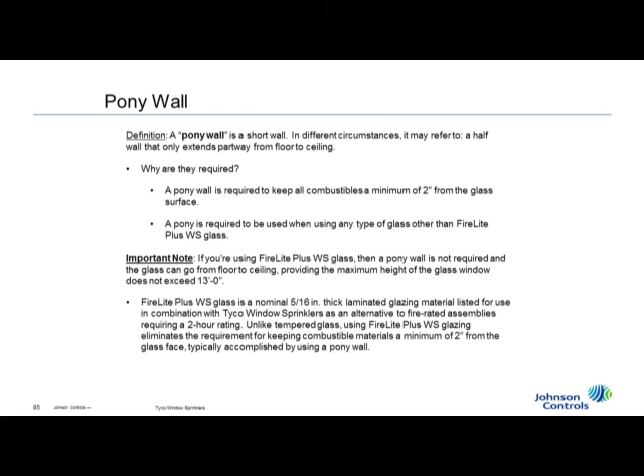So the pony wall, and again, what this was to do is keep combustibles directly off the glazing units. And that's really all it is, a small wall about knee-high that is spaced far enough away that combustibles can't be pushed right up against it.

Our testing was with the FireLite glazing, but here's an example of a pony wall. Small wall here that just keeps everything off of it. If allowed, you could utilize a different type of construction rather than gypsum board or drywall, and I'll show you an example there as well.

Same concept with our horizontal sidewall. We just want to make sure that the combustibles are not directly on there.

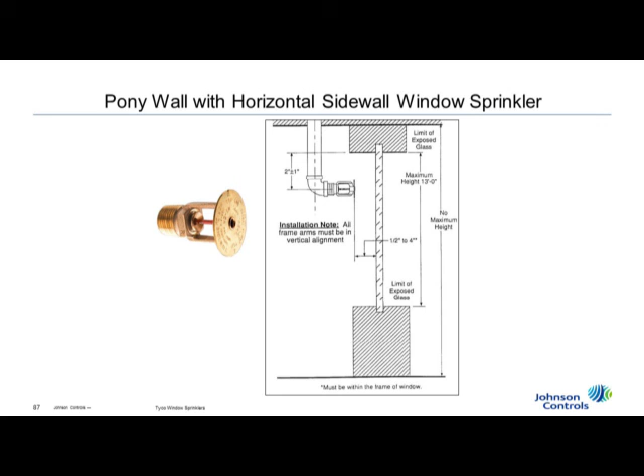So there are very definitive requirements for this pony wall, but it is kind of flexible depending on what your scenario is.

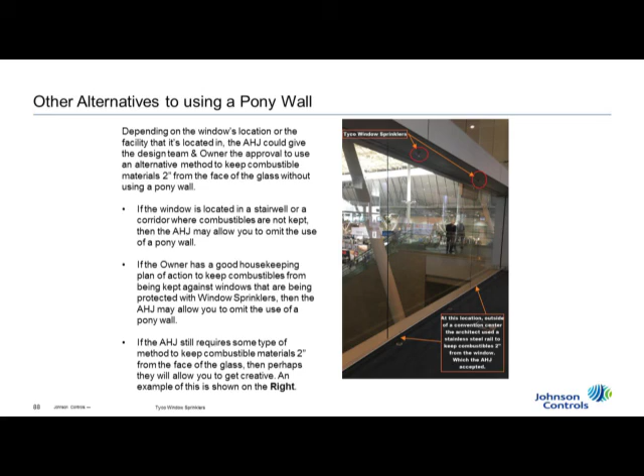So I kind of challenge you as you move forward through either your career or through these different design phases and the growth of the fire protection industry here in Brazil to take a look at these other options, because just because we're used to one direction and one protection scheme doesn't necessarily mean that it's the most effective and the most efficient. So I leave that with you, and if you have any questions, feel free to contact me. My contact information will be up here, and we'll also have a moment here for questions.